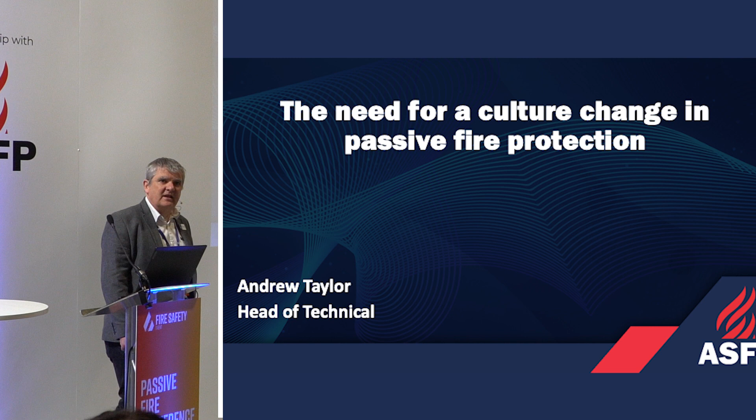Afternoon, everybody. For some strange reason, it's 2:30 and I'm doing the last slot. It seems like there's still half the day left, but you got that level right? Is that about right? So he said, just talk to yourself while he gets the level right. And that's what I'm going to do for the next three-quarters of an hour anyway, so I might as well.

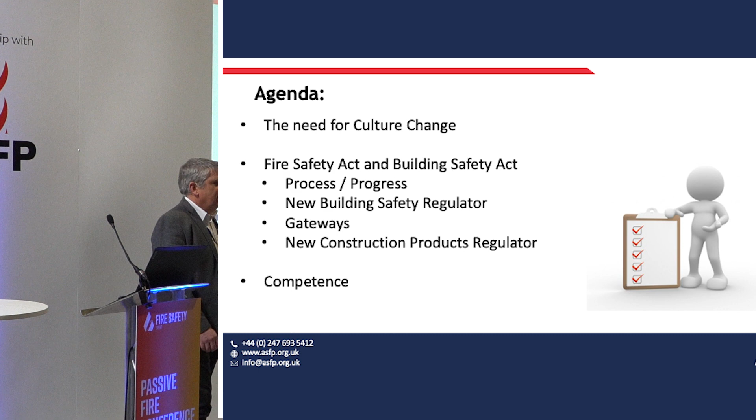If you've seen this, it's about the 27th iteration of this talk, because it's evolved over the last three years. So please feel free, if you've seen any of the 26 before, to play Spot the Difference. And there are a few this time round.

We're going to talk a bit about the need for culture change in passive fire protection. We talked a bit this morning with the PFKG slot, and had a conversation towards the end about whether passive fire protection was a separate construction discipline, that there was a need for some sort of thing to represent it. Will from Tier 1 said yes, and I, from ASFP, said well, it already exists, it's us. We're going to talk a bit about that.

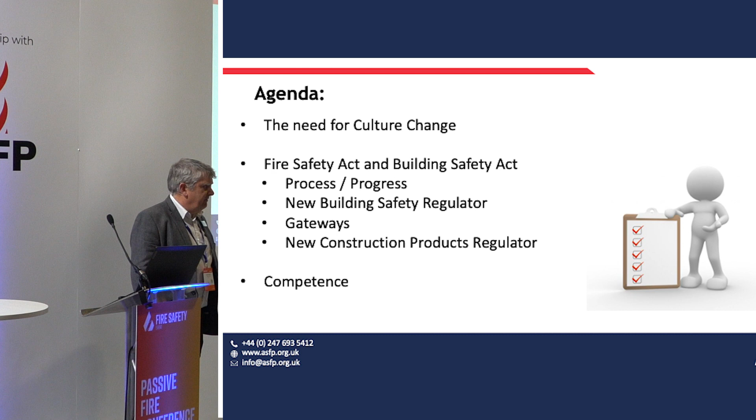We'll go and dive into the regulations and how we're going through them, how the regulations are developing post-Grenfell, what we know and what we might guess, because we don't know it formally, and when we might know it and what's supposed to be happening. And right at the end we will talk a bit about competence, but only briefly.

We still see examples posted on LinkedIn and when we go around sites of stuff that's patently, obviously wrong. If you look at the first two here, you've got plastic pipes, half in, half out of a wall. Whoever designed and came up with a design that covers that, that's never something any testing program is going to be able to do, and it's never something any product is going to be able to deal with.

So my answer to that will be to point to the Tier 1s, point to the principal designer, the principal contractor, and say, can you not, please? Because that's purely a design issue.

On the far side, we've got some poor installations. That was using pink foam for a squirty floor seal, because that load-bearing pink polyurethane foam? I think not. And then the other one is my favourite picture that I always trot out, which is the door reveal filled with those fire-resistant site shoe covers. I mean, where's the tested detail for that?

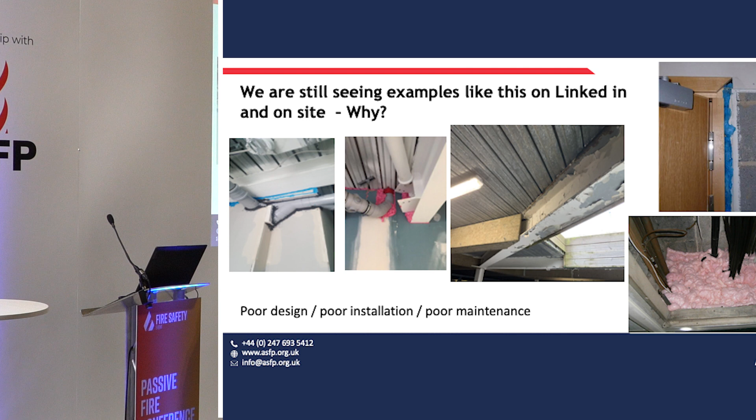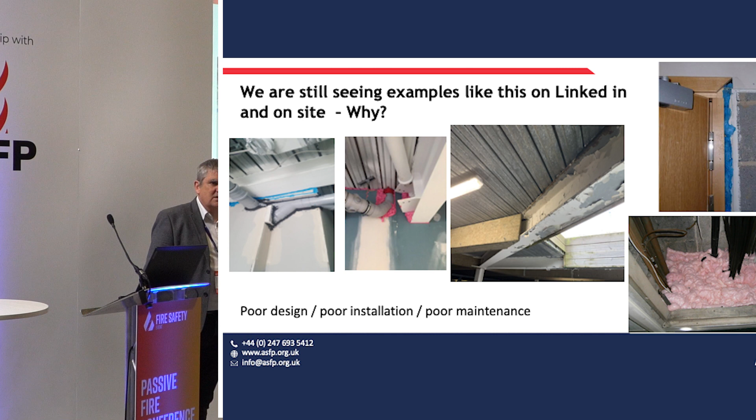And then the one in the middle is an example of, well, it's got just about everything gone wrong with that particular picture. The specification shows an external application of an intumescent coating without an external specification on it, it's had no maintenance, and the joint detail where the boarding system comes into it has a big hole. So you've got poor design, poor specification, poor installation, and no maintenance. And that's the outcome.

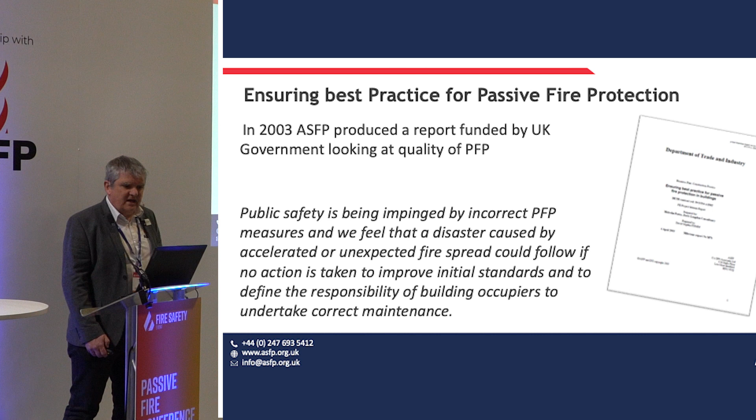Now, this is in effect, for us here within the ASFP world, nothing new. This is stuff we've been talking about since this report done back in 2003, led by ASFP, by our chairman at the time, a guy by the name of David Sugden - for those of you aware of Suggy's reputation, sadly no longer with us, I'm still talking about you. And this was a piece of text from within that report, which recommends and foretells of problems, and recommends that we need to make steps and strides to improve standards of design, installation, and maintenance.

And of course, why do we need passive fire protection? What's so important about this? We've got two examples on the screen here. I'm sure many of you recognise Lakanal House,

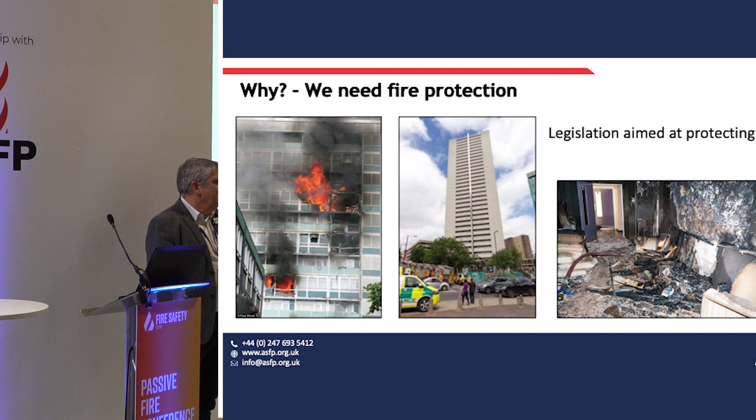which saw 6 lives lost in 2009. How many of you recognise the middle one? And if you recognise it, have you seen me talk about it before, or do you know what it is? The building name is Cleveland Tower. It's the 23rd floor fire.

How many of you heard of the Cleveland Tower fire? There's a reason why you've not heard of it - it happened a week after Grenfell. There was a fire on the 23rd story of that building. The compartmentation worked, the fire was maintained in its compartment of origin, but you can see it was a serious fire, a proper fire. Yet you've never heard of Cleveland Tower because it wasn't a story. The fire brigade went in, they put the fire out, everybody was happy. That's why you've never heard of Cleveland Tower.

That's why passive fire protection works.

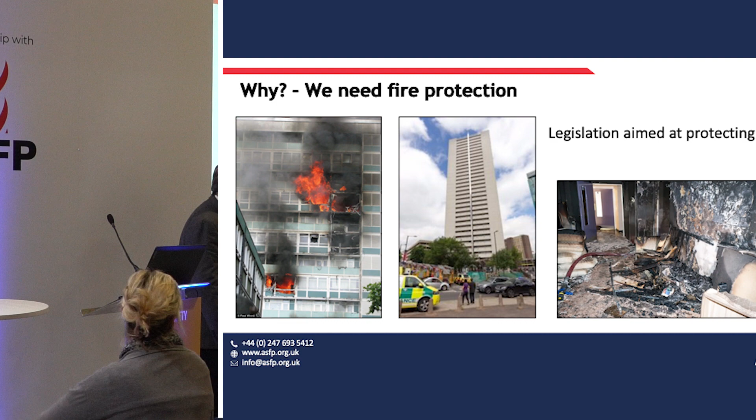Obviously, everything that we're doing nowadays comes back to a point in time. If you look at our fire regulations, they always get changed immediately after a major disaster. The vast majority of our reaction to fire stuff dates back to King's Cross.

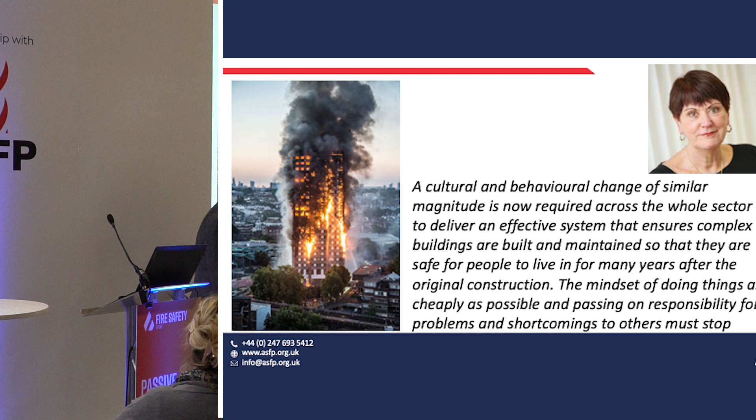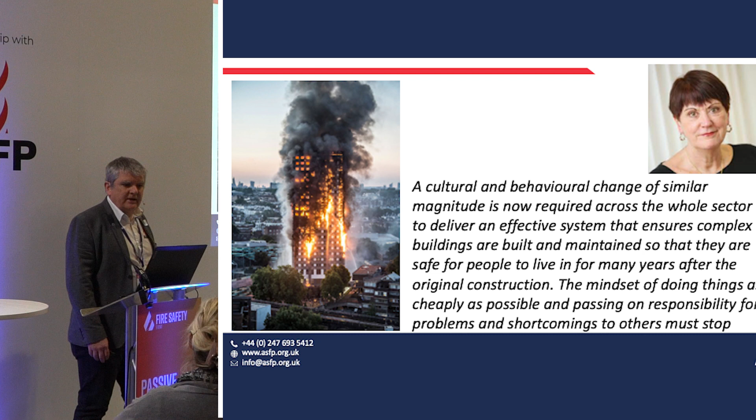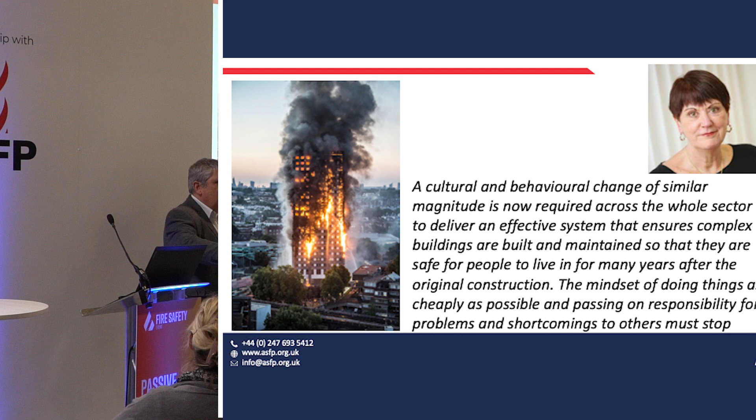This is a piece of text from Building a Safer Future. I'm sure you've seen pictures of the book if you've not actually read it. Dame Judith Hackitt back then said, construction, you need to change your culture. You need to make sure that it's not just the race to the bottom and best last price. It's not got to be as cheap as possible, and we've not got to be looking to pass the responsibility everywhere in the contractual chain.

That text comes from the report she published. She's made a lot of recommendations, 53 in total, including, and primarily the key things being these gateway steps. I'm going to talk a bit more about what those gateways are and precisely what they mean as we get further on in the presentation.

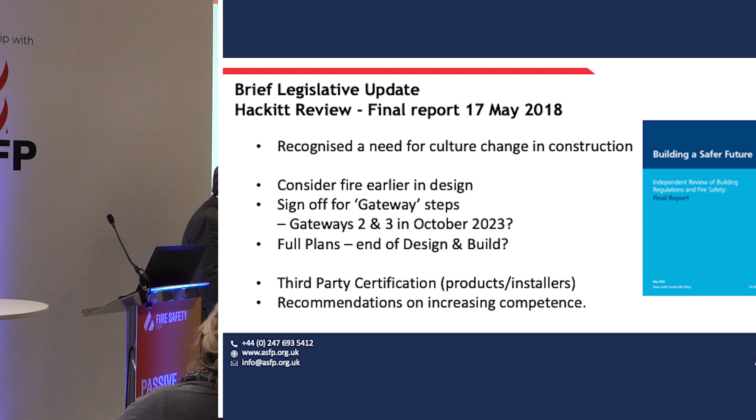She recommended full plans. She made recommendation of third-party certification of products and installers, which has been a tenet of what ASFP has talked about forever, since we were founded in 1977. And she made recommendations that we all needed to increase our competence and have a formal way of showing that we'd done that.

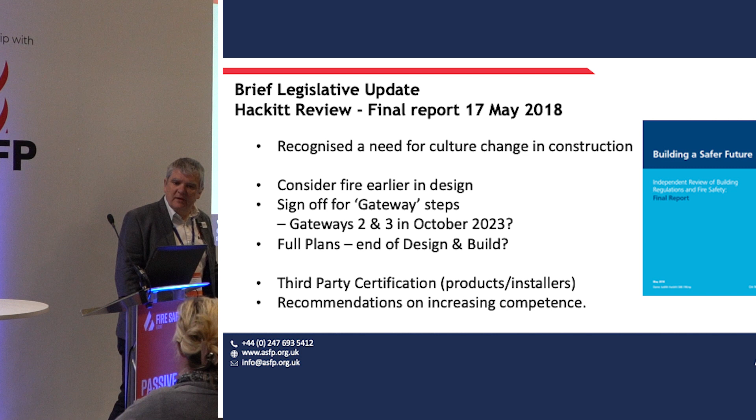There are two key pieces of legislation that the government has done on that. One's the Fire Safety Act, which passed into law in April, brings external walls and flat front doors into the scope of the Regulatory Reform Fire Safety Order. If I'm allowed to do it, I'd say my one joke here - other shapes of front doors, it's only flat front doors, other shapes aren't allowed.

There are problems with this, but it's been implemented now. On the 23rd of January, we had some Fire Safety England regulations go live, and so there's now all sorts of requirements on flat front door inspections and the like. We're still working - the industry response group is still working on setting up the competence of the fire risk assessors for this. But we've got lots of that already in place.

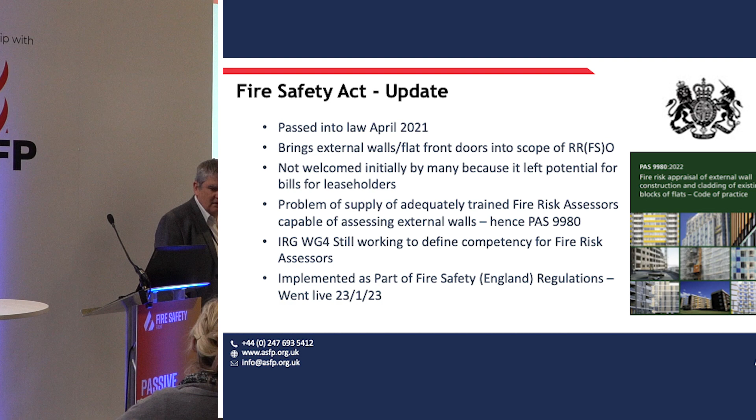The other side of the coin is a thing called the Building Safety Act, which got Royal Assent in April last year. We actually got the final text of it in May last year, and that's enabling legislation. So it gives enabling legislation for the Dame Judith Hackitt recommendations, and it gives the Secretary of State powers to do stuff. So it's the framework by which stuff is going to change, but it doesn't actually contain all the detail and all the nuts and bolts of what's involved.

There were a couple of changes in that Building Safety Act as published that were not necessarily following through already on some of the stuff that Dame Judith had asked for. One of the key ones, Building Safety Manager, the text of that was removed. Principal designer and principal contractor remain the same, and the principal designer is responsible for the design of the building up to and including what we'll talk about as Gateway 2, and principal contractor for delivering it through to Gateway 3. But that's subtly different.

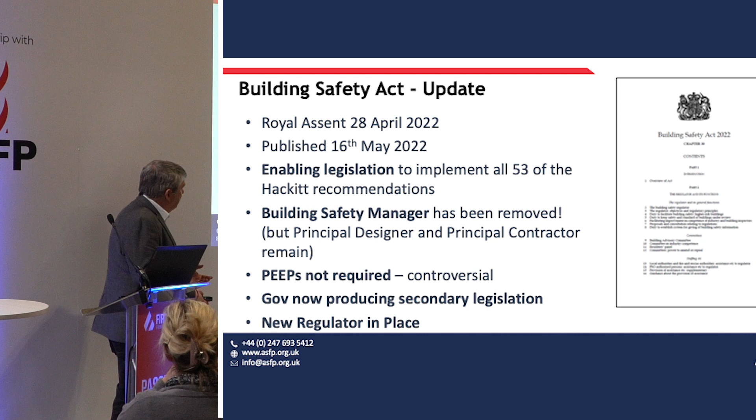PEEPs are not required - personal emergency evacuation plans. What we now see is two key developments here. Government's now tasked with producing the secondary legislation. I was hoping there were various bits of this secondary legislation that were due to be published in February. The idea is that they consult on it.

Having consulted on it, they produce secondary legislation, and then we discuss and agree it, and then it gets published. Some of that we were expecting to see draft stuff out in February, and it hasn't come.

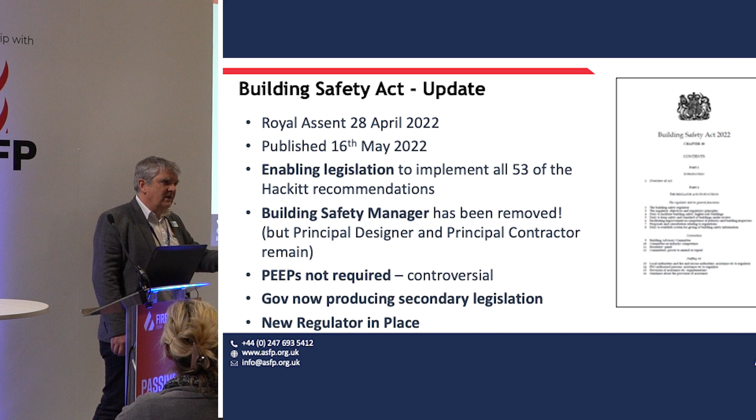But there is a new regulator, primarily for buildings, which we'll talk about in a couple of slides. In fact, next slide, and they're now formally live. So there is a new regulator for buildings that's live, under the auspices of HSE, the National Building Safety Regulator. Regulators went live as of the start of this month.

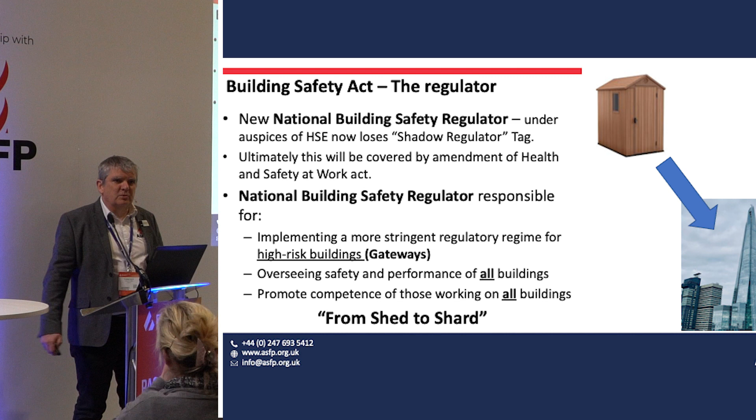I'm sure whoever came up with that, you probably sat there feeling proud of yourself. But so they do - HSE will be doing stuff from shed to shard, but it's more the shard end of stuff where the gateways are going to come into force.

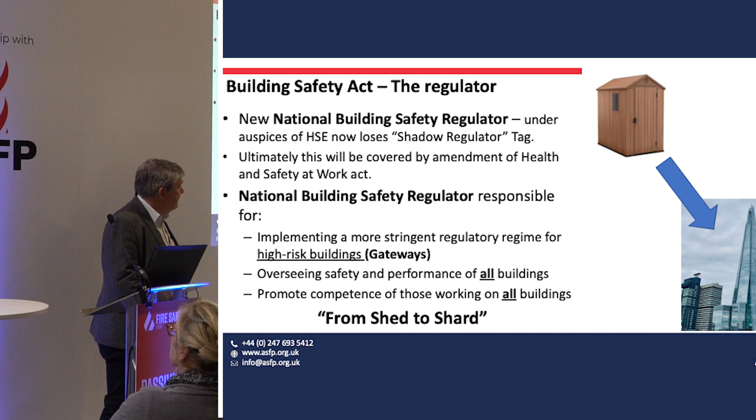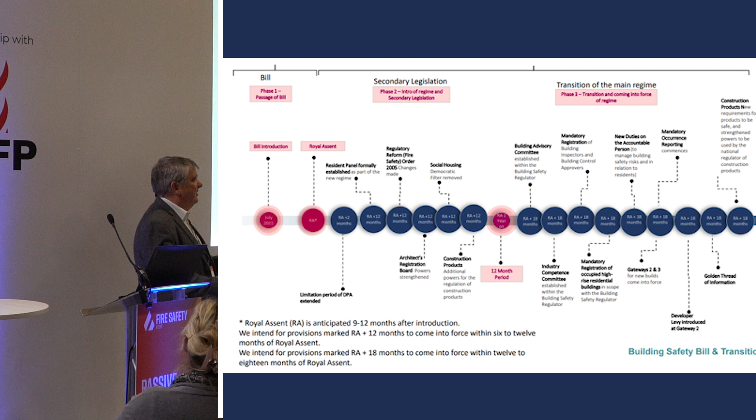So royal assent plus 2 months, we were going to extend the limitation period of the Defective Premises Act. That's already been done - for residential buildings, historic residential buildings, Defective Premises Act regulations now go back 30 years. For new builds being constructed going forward, DPA is extended from 6 years to 15 years. So there's an awful lot of stuff, and that covers everything - a much greater level of liability on what we build now, and to a certain extent on what's been built in the past.

Beyond that, let's have a look in more detail at that block of stuff that sat there in the middle, royal assent plus 12 months. So there's a resident panel - HSE's already, this should be going through now, this is April this year. HSE is now live, establishing a resident panel.

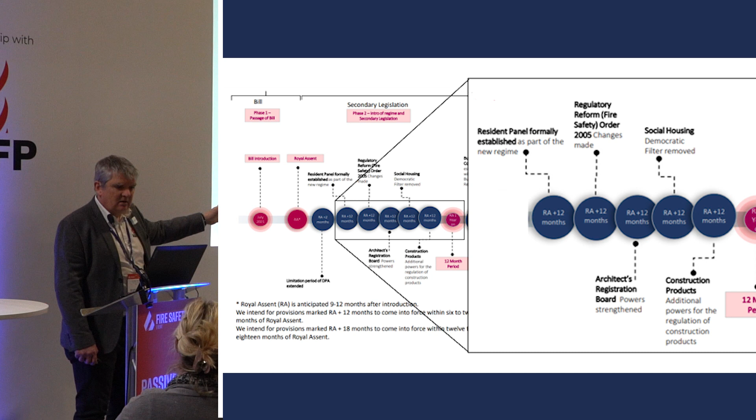It's redone the regulatory reform order, that went live on the 23rd of January. It says the Architects Registration Board - don't ask me, I don't know. The far one says additional powers for the regulation of construction products. Now, as far as I'm aware, we're still waiting for the draft regulations to underpin that one.

We're still waiting for that. So that was meant to be - and thankfully Laura's nodding, so I'm just looking at my OPSS contacts, they're nodding at me - we're still waiting for those powers to be laid, and we're still waiting for that. That gets us to 12 months.

What then comes next is this block of stuff at the period 18 months, this is October this year. October this year, the Building Advisory Committee is going to be established. They're already meeting, so big tick for that one - we're ahead of the game, ahead of the curve.

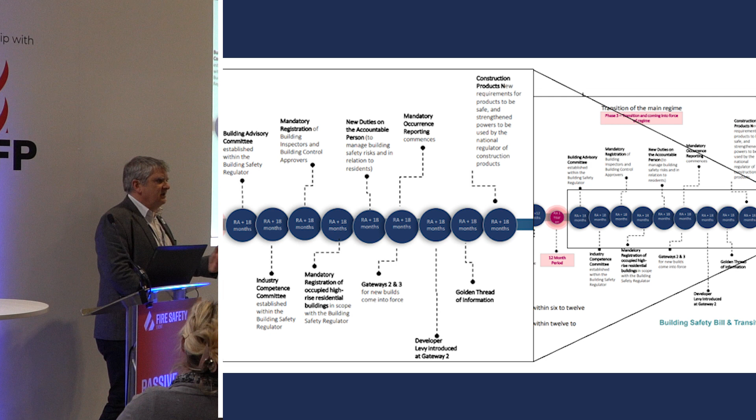The Industry Competence Committee will be established. There's already an interim committee that's been doing that for the last 2 years, and there's now applications invited to join this formal committee.

So that's good - mandatory registration of occupied buildings. The conference in March was delivering that. That registration system is open, and if you are responsible for a high risk residential building, you should be registering that now on the HSE's web portal. You should find out more about that from HSE, because they're pushing that already, but that system is up and running.

Gateways 2 and 3 for new builds come into force. This is an interesting one, and we're going to talk more about this. But gateways 2 and 3, we haven't seen the secondary legislation for that yet. We're told it's coming, we're told the gateways will be here as of the 1st of October. But as time ticks by, the implementation is getting harder and harder to do.

There's lots of other stuff - construction products, new requirements, toughened and strengthened powers for OPSS. That's meant to be at Royal Assent plus 18 months, that's October, but we're still waiting to see what that secondary legislation looks like. So there's still bits and pieces of secondary legislation we're waiting for. When they come, there's meant to be a consultation, questions asked about how it all works, and then we can get that forwards. So that's when it's meant to be, and what it will be, how we get there, we don't know. We're keeping an eye on it.

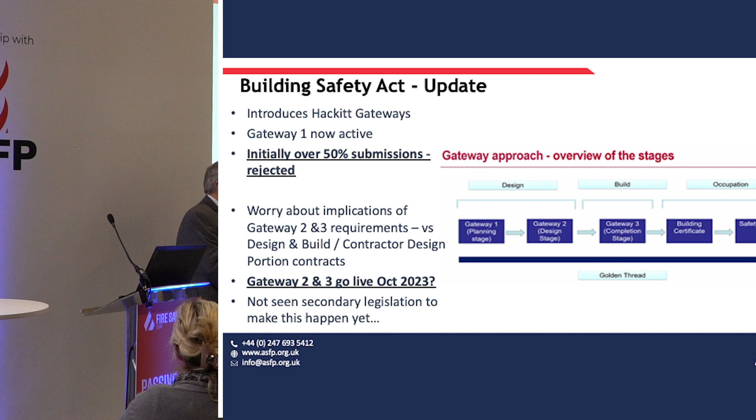HSE will want to know if you want to make a major change to your design. Some of the discussions about getting from Gateway 2 to Gateway 3, and what's going to go in this secondary legislation, are about: what's a major change and what's a minor change? What can you do and just advise HSE of at the end? What can't you do? And what do you need to stop and let HSE know during the process?

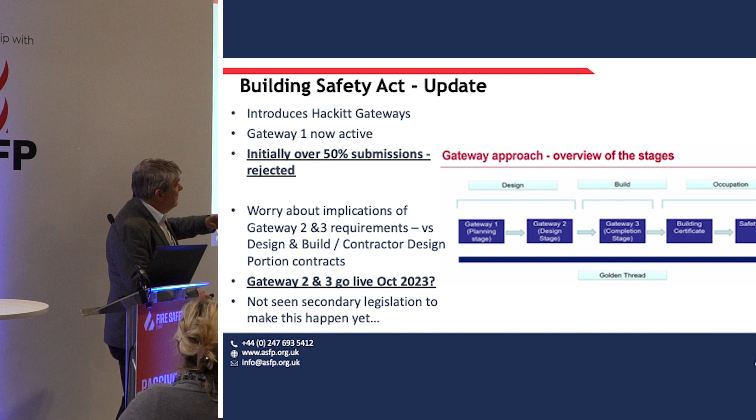Once you've done it, you get your building certificate, and then you've got to keep a safety case running. How do you maintain that building? How do you show that building is safe for people to occupy?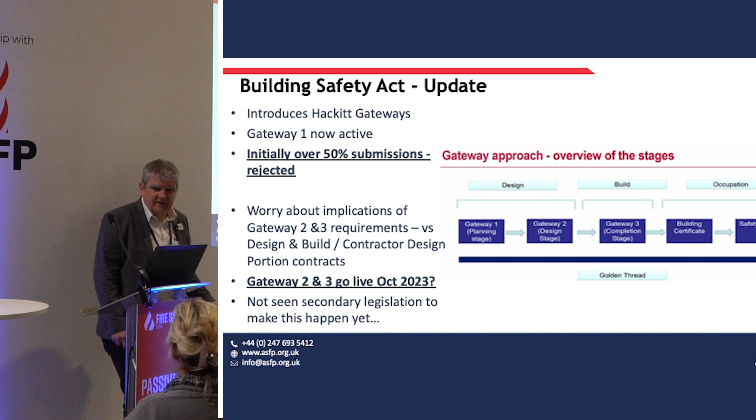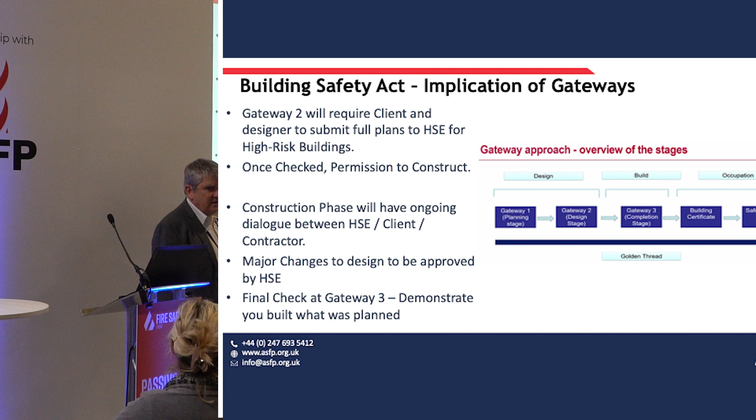Okay, well I think we've already covered that on the previous slide - the Gateway 2 point, yeah - final check at Gateway 3, demonstrate what you built was what you planned. One of the key things that sits underneath all this is the golden thread, okay? Or possibly the golden rope, depending upon your point of view.

We were consulted, and we did a consultation in October last year about what's in the golden thread and the extent of information needed in that golden thread going forwards. So if you're designing something, there's going to be a much greater need going forwards for record keeping to show what you've designed is what you've built. And the onus at the moment is on the client to collate and submit all this - the building owner, the asset owner.

They're going to need all this information for the safety case to use that building, to prove what they've got is right, and also to prove that the competence of the people that did the work is right. So there's an element of this that drives responsibility onto the client - are they necessarily the right people to do that? But they're the one person that remains in the contractual chain and stays involved in the building.

So if Gateway 3 is going to drive an increased level of recording of installed systems, then one of the things we need is well-defined inspection, well-defined record keeping systems. And we're going to need to get smarter with digital recording.

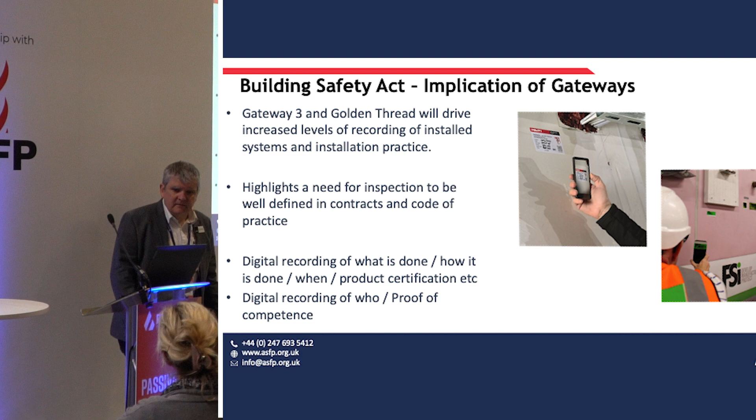We're also going to get a mandatory occurrence reporting system. We think it's going to be based on what CROSS is doing. CROSS is starting to look at passive fire, and we think it's going to be something similar to this.

What's going to be a reportable occurrence? There's a definition of that, and we'll be reporting occurrences to HSE, and HSE will be learning. So it's adopting a model very similar to what we already have in the structural world - similar to what we see in aircraft and avionics, where we need better recording rather than hiding these things.

And if you're interested in this, CROSS is now looking at fire, structural fire. So if that's of particular interest to you, sign up - it's a really interesting newsletter.

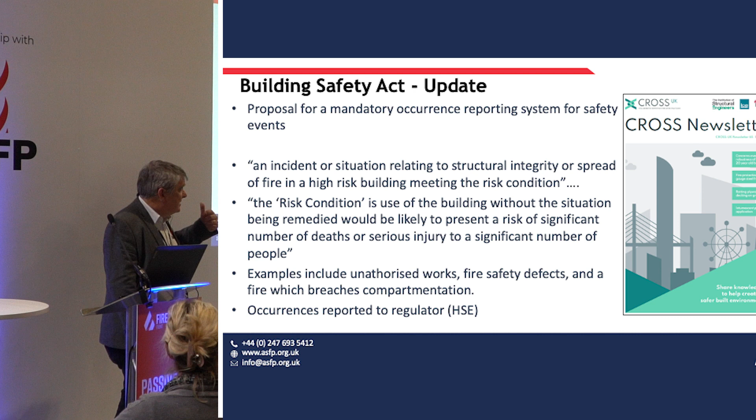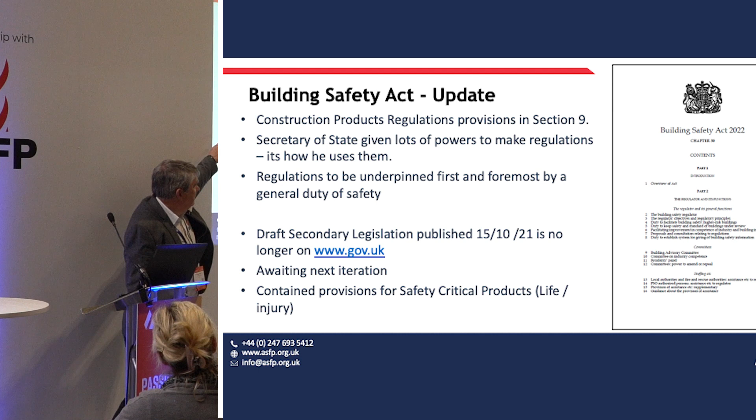So we've mentioned this already - our Construction Products Regulations took the stuff in the Building Safety Act, tucked away at the back. It gives the Secretary of State powers to make regulation, but we haven't necessarily seen what those look like. There was an iteration published in October 21, but that's been taken off the government website. We are waiting for our friends from DLUHC to give us the next iteration.

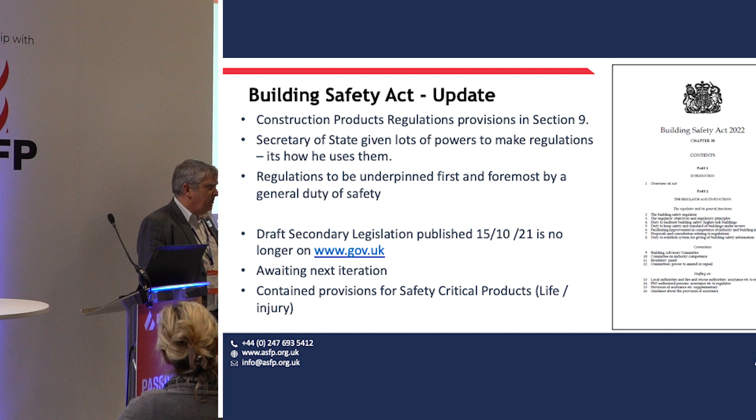Now, and coming sooner than we think - but I'll talk about why that is in a couple of slides' time.

The Office of Product Safety and Standards was set up as a construction products regulator, so we've needed this for a while because a lot of this is really complicated. It's too complicated for trading standards people to deal with, and there's not a lot of case history even in Europe for construction products being regulated by trading standards, because it's too hard and too complicated.

They've got all sorts of powers to protect you, to rectify problems, to compel manufacturers to remove stuff from the market, and a lot of these powers already exist. It's being run by a group of people for OPSS. They were under BEIS, they're now under the Department for Business and Trade, because the energy thing got taken out by Rishi's reshuffle.

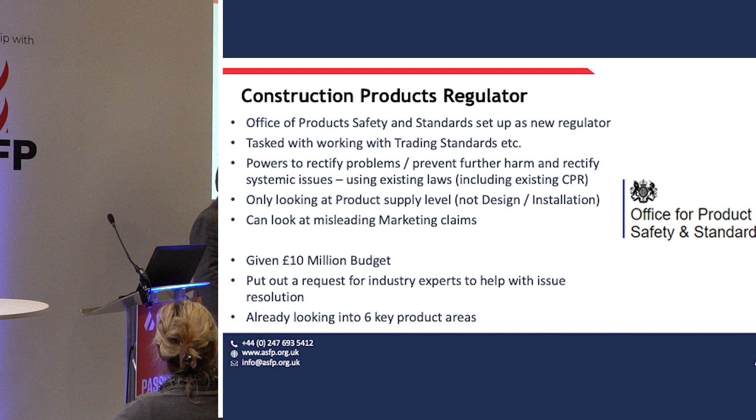And they can look at things like misleading marketing claims. What they're not necessarily looking at is design and installation. They are looking at stuff relating to manufacturers - what they're selling, what they say they're selling, and will it do what they say it will.

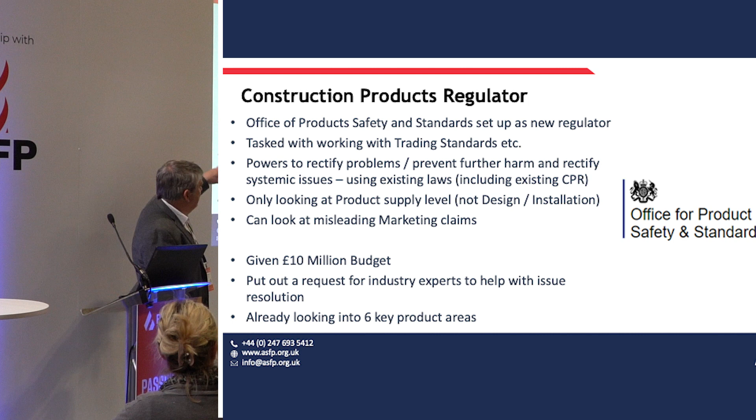They've put out a call for industry experts to help with issue resolution, and they're already looking into 6 key product areas, a lot of which has come out of Grenfell - so fire doors, external wall systems, smoke control systems are on their list, and they're on with those as we speak.

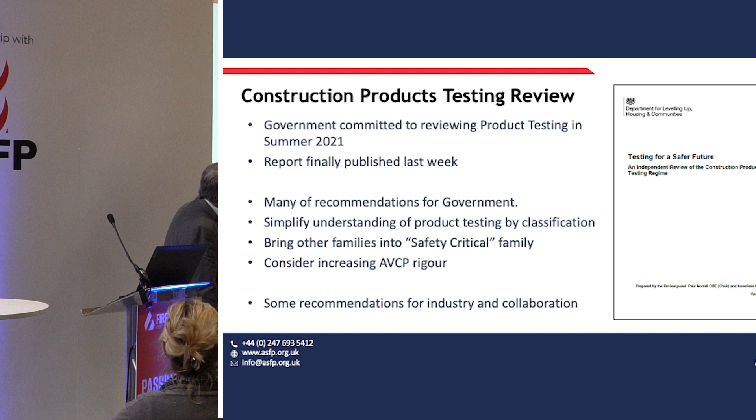Now this is brand new, almost hot off the press. Government committed to doing a review of construction products testing in summer 2021. A guy called Paul Morrell chaired it, with a QC on board as well to help with that - she's now a KC, of course. The report was meant to come out around October, November 2021. It came out last week, on Thursday.

I'll be honest, I haven't stopped and counted them, but I reckon it makes about 80 or 90 recommendations on what we should do with construction product testing. Many of those recommendations fall onto government.

One of the interesting ones was that they think as an industry we should look to simplify our understanding of product testing using a classification system. Now, the classification system we have at the moment is the European classification system - apart from BS476. There's a little bit of one for reaction to fire and a little bit of one for fire doors, but there isn't one for the rest of passive fire.

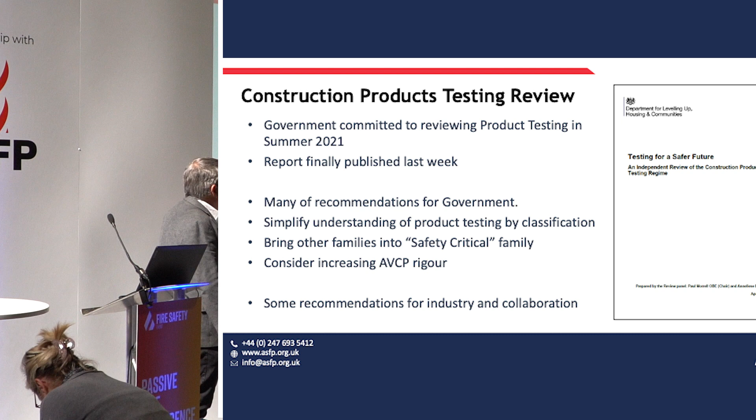The interesting thing is that there may be a whole host of reasons why it makes sense as a recommendation, but it's really hard and really complicated to do. If you want to know more about that, either come to Niall's presentation tomorrow or have a look on the ASFP website - Niall and I did a webinar in January about the end of 476.

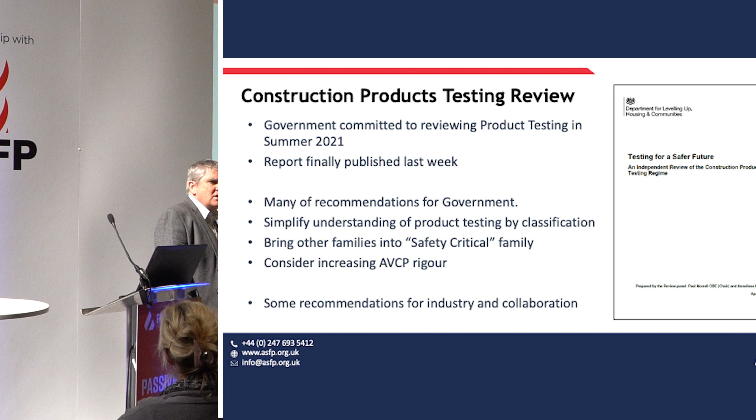They're still talking about bringing product families into a safety critical system - we'll talk about that on the next slide. And it considers, from those of you that saw Tariq's presentation just before this, increasing the AVCP rigor - moving things from System 4 to System 3 to System 2, increasing the amount of rigor in our conformity assessments.

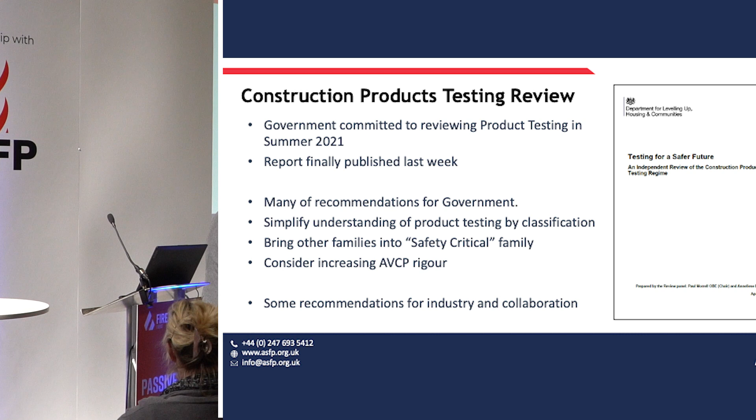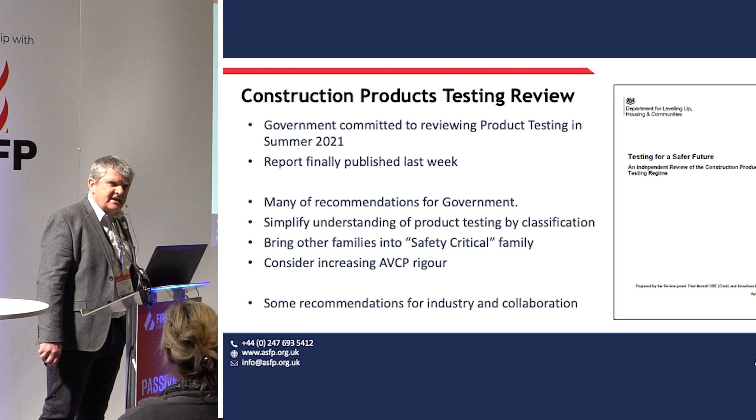So there's more tasks for the notified body, more increased sampling, increased testing and assessment by outside companies. There are recommendations for industry too, and of course lots of recommendations that one party alone isn't going to be able to solve. To make this happen we're going to have to work together - collaboration, which brings me back to culture change, because we're going to have to talk more to one another and make sure it all works together.

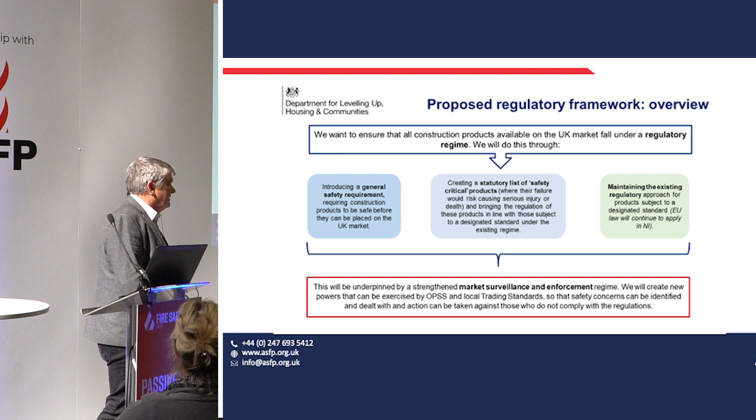It's now been subtly changed because it's now UK designated by Brexit, but it's there. In my world, in passive fire world, that's dampers - and the rest of the stuff we deal with: fire stopping, intumescence, structural protection, board sprays, cavity barriers - they potentially fall into this black hole in the middle. They need something more than a general product safety requirement, but they're outside the existing regulatory framework. So we end up with government creating a thing called safety critical, which will behave like a designated standard with a high level of attestation of quality.

There's lots of conversations about competence going forward, and I think you'd all agree - if you wind the clock back 5 years, people were ignorant to risk in construction, didn't necessarily pay attention to what was going on, and we ignored them. Nowadays we're more risk averse, and the risk flows downhill down the contractual chain, and manufacturers turn around to me and say, 'Oh, it ends up with us, and we've got nowhere to put it.' So there's a lot of stuff - we need to work better together to deliver safer buildings, and look at how we can manage and understand the risks, rather than just looking to make sure that whatever happens, none of that risk ends up with me.

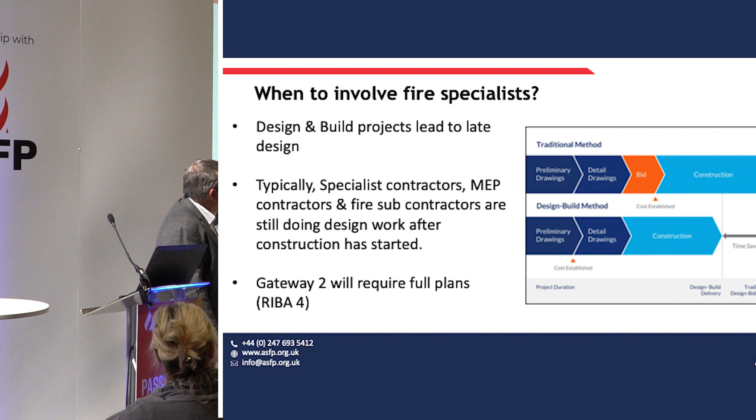It's just a few slides, to be honest we've already covered this. So, design - when should we involve fire specialists? Well, as soon as you can. And you're going to have to now, because Gateway 2 is going to say don't wait till you're on site and bring a fire specialist in, because they're going to change all your designs.

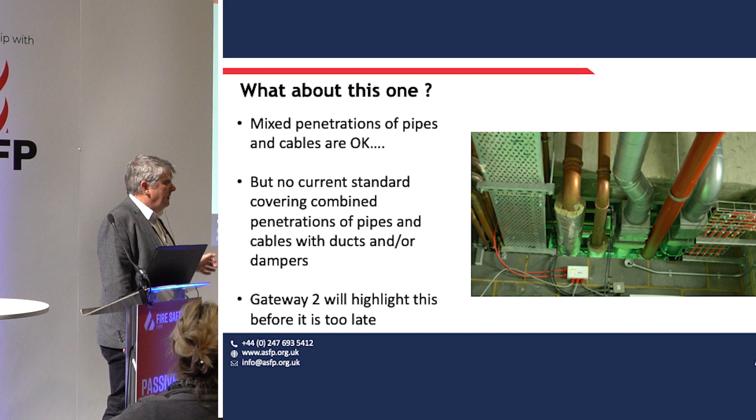I use this one as my example. It's brilliant - whoever did the spatial coordination design on this gets an award. Poor fire stoppers left looking at it thinking, what do I do with that? I've got no standard for it. It's got a smoke control damper that's not in the plane of the wall, in the same opening as all these pipes and cables. From a fire stopping standpoint, it's a nightmare. So we turn around - and that's if you can actually get to it and get into it and sort it out. So spatial coordination looks brilliant, 10 out of 10. Passive fire protection, none out of 10. Can you not? Please, can you don't?

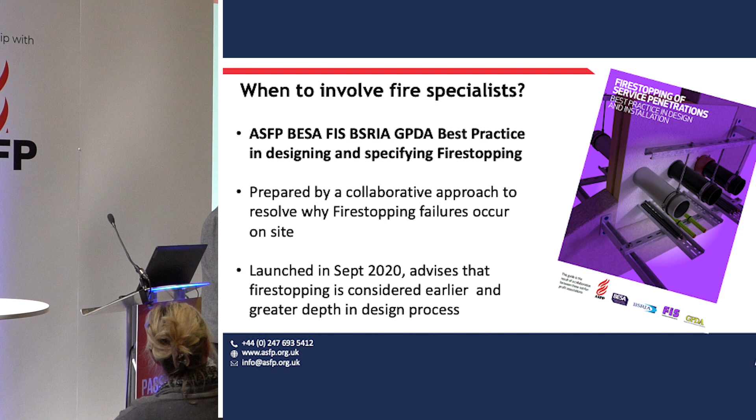So this is the sort of thing we work on with a lot of people. We put together guidance saying this is how we need to collaborate more, talk earlier, and in greater depth in the design process. We said that back then, and it's still true now, and the culture change in fire is going to demand that we do this more and more going forward.

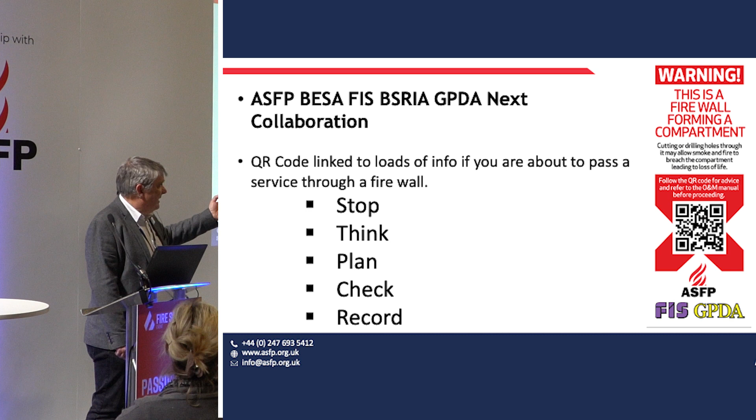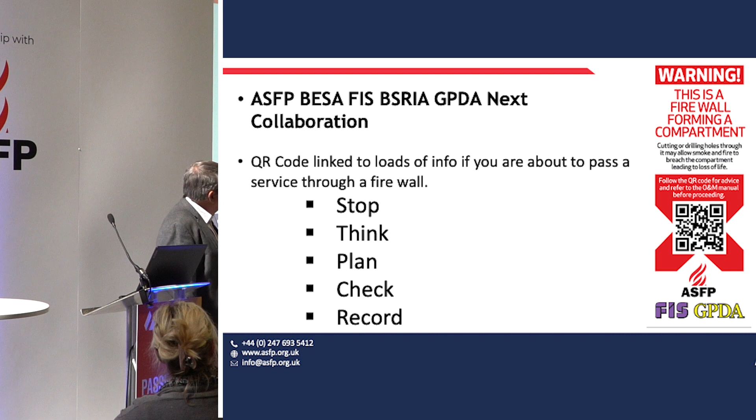We did another one with FIS - that QR code, if you're interested, does actually work. Here's a label to put on a firewall. Comes back to stopping my telecoms engineer armed with his precision claw hammer, smashing holes in walls to pass cables through, and then doing nothing about it. There's this sticker on it that says stop, think about it, this is a firewall - are you going to breach the fire compartmentation? If you are, what do you need to do? You need to plan, you need to check, you need to record, because Golden Thread will demand that you plan, check, record anything that goes through that fire compartment.

So we are going to have to collaborate a lot more. No one has all the answers. We need to collaborate, we're going to have to design better, design simpler, and we're certainly going to have to do it more thoroughly. Because the easiest way to get through Gateway 2 is going to be to plan it better, to design it better - get your manufacturers involved, get your specialist contractors involved, get whoever's taking that design liability involved before it goes to plan, so that when you construct what was designed, you don't need to change it.

That way Gateway 3 is easy. Record, keep the records, and maintain it in place. That way you can continue to occupy the building and it will be safe for all its occupants. It's a really simple recipe - he says sounds simple, it's going to be really, really hard, it's going to be a real change. But we're going to have to do it to deliver all this going forward.

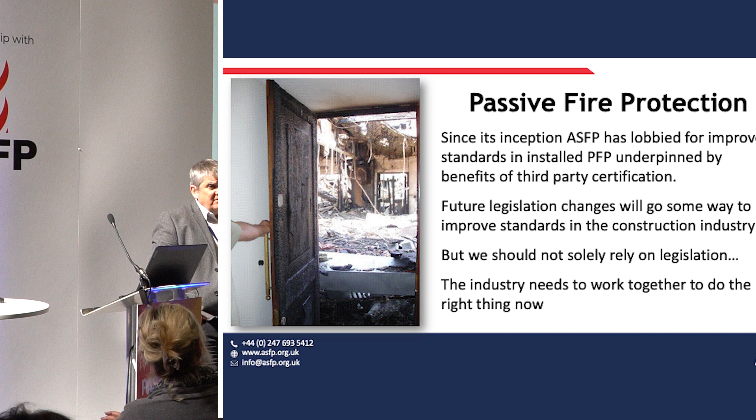Will those be consult-before-you-do-it versus do-it-and-then-advise? Yes. So major is stop, tell, let them think about it for a while, because HSE will have a response time they've got to give. Although interestingly, no response from HSE is not a green light, unfortunately. So major ones you have to discuss before you do. Minor ones - I can't remember whether it's do and tell, or do and tell later - but you will have to.